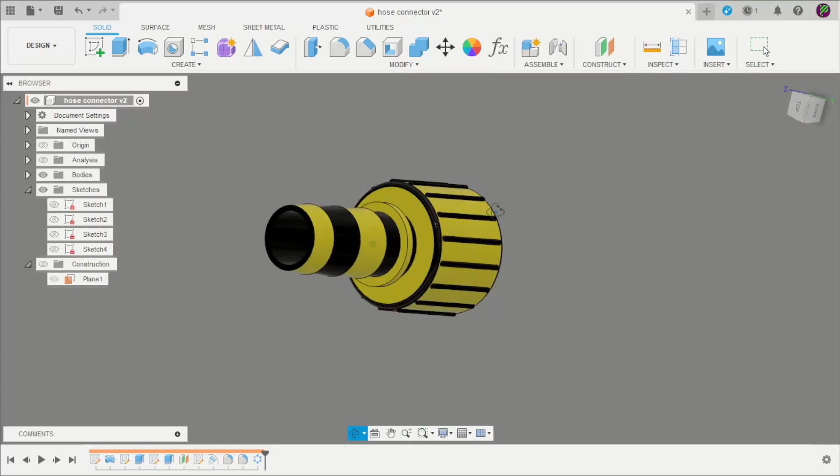For today I have this hose connector that I will create using just one profile for the revolve. I created this drawing to help you design this project. This drawing is in my ebook, which you can download on the first link of the description and follow the instructions.

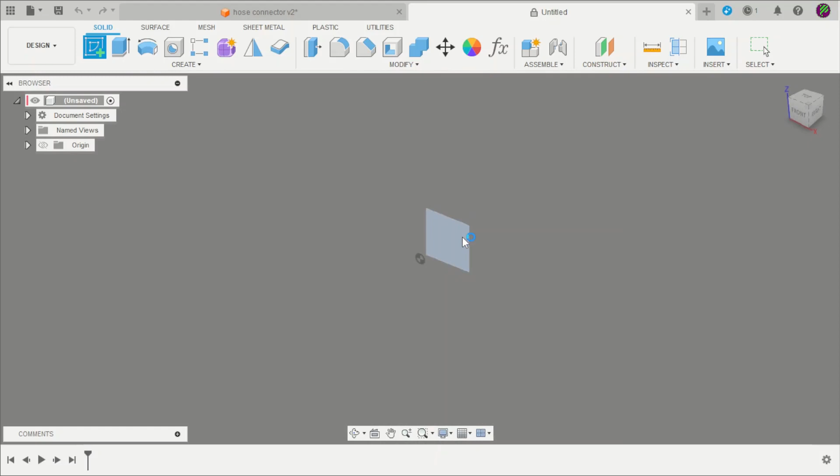Let's start. Create a sketch. Select the plane. Create a line that will be a center line. You can start by creating another line here that will be a construction line.

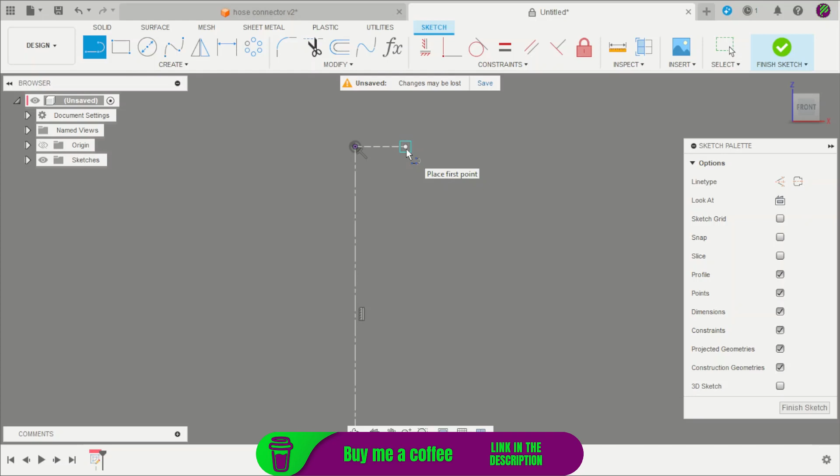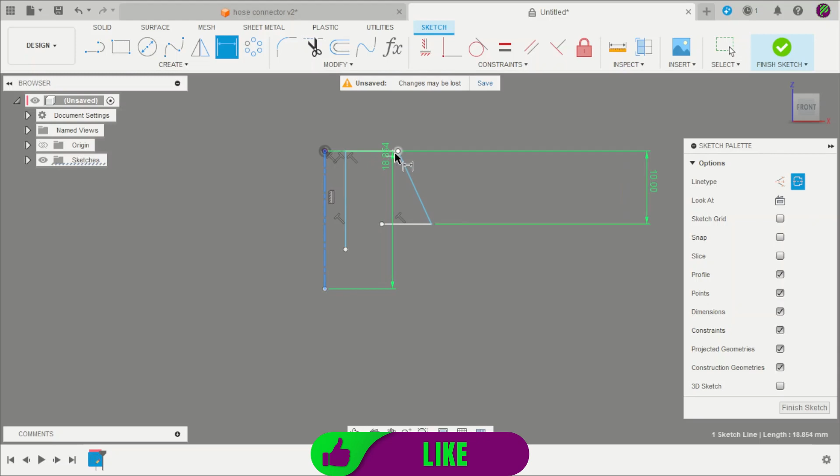Now I can start creating some lines here, here, and here. This distance needs to be 10 millimeters. This profile is 20 millimeters. This point with the center line is 24, and this point with the center line is 26 millimeters.

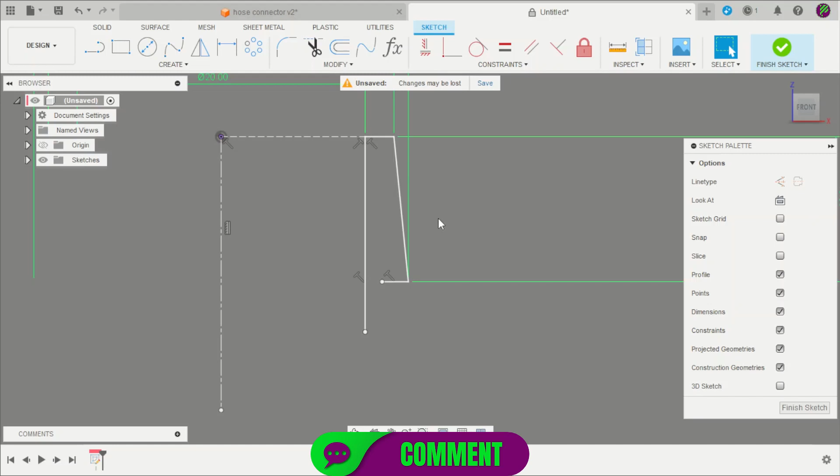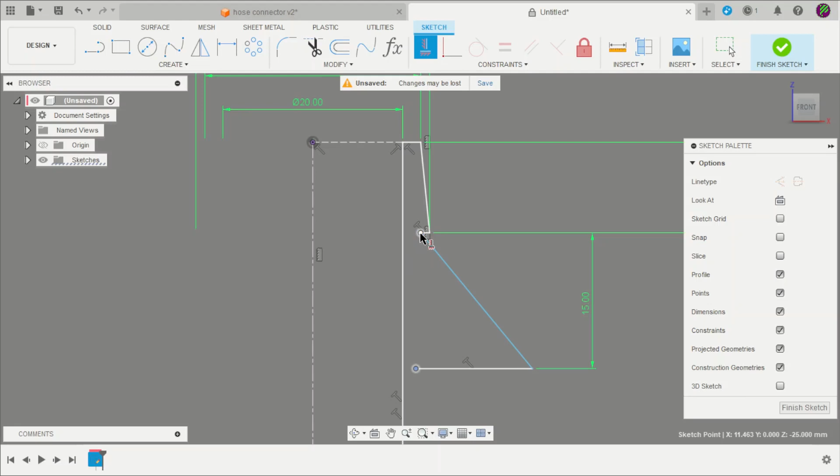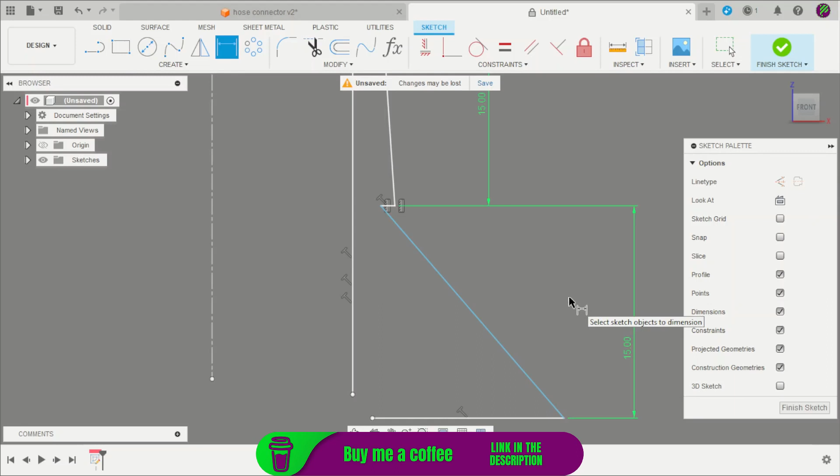That is the second profile, and repeat the process here and here. This is 15 millimeters, and constrain with the vertical 24 and 26. Now we have our profile.

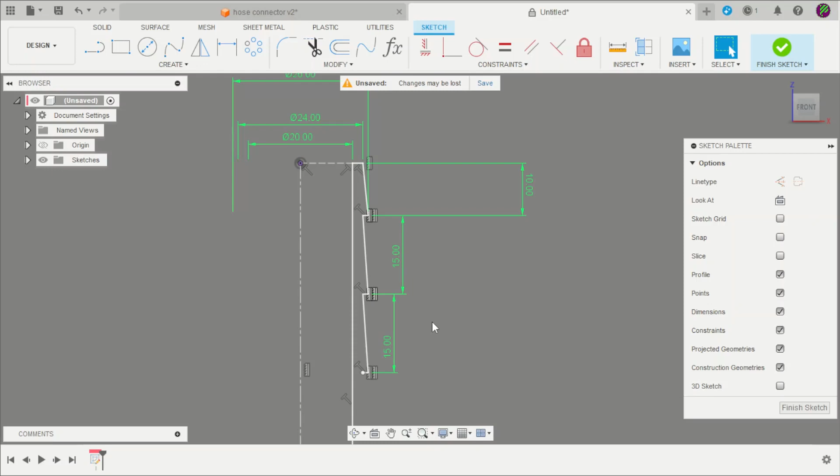Remember, just the first tooth is 10 millimeters and the next two are 15 millimeters. Now we can continue creating here. This diameter is 24. Continue creating here. Create the profile.

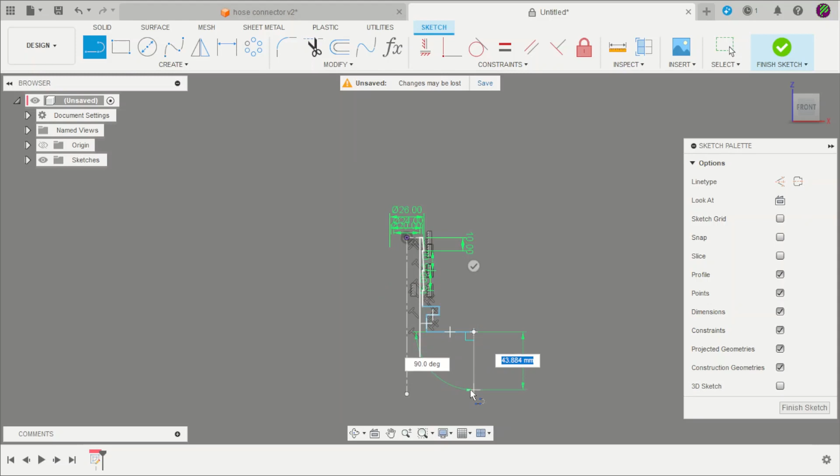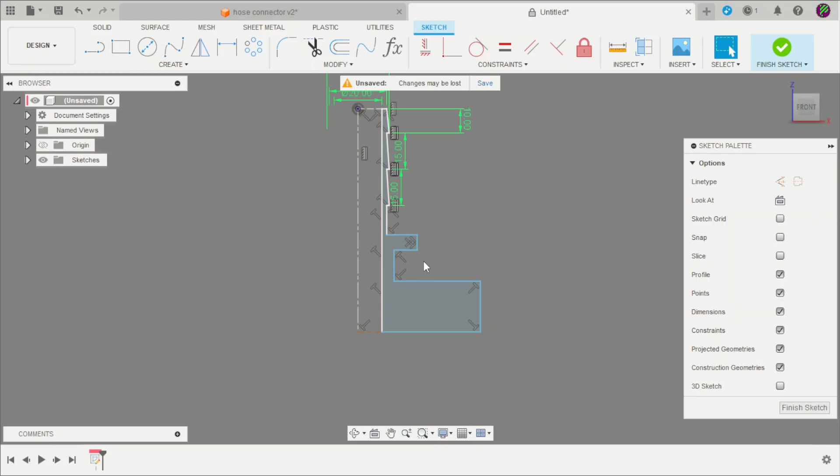Create this line and create another line. This second line is a normal. You can close this profile here and that point. 24 millimeters. This distance is 3 millimeters with 31 millimeters diameter. This is 26 millimeters diameter.

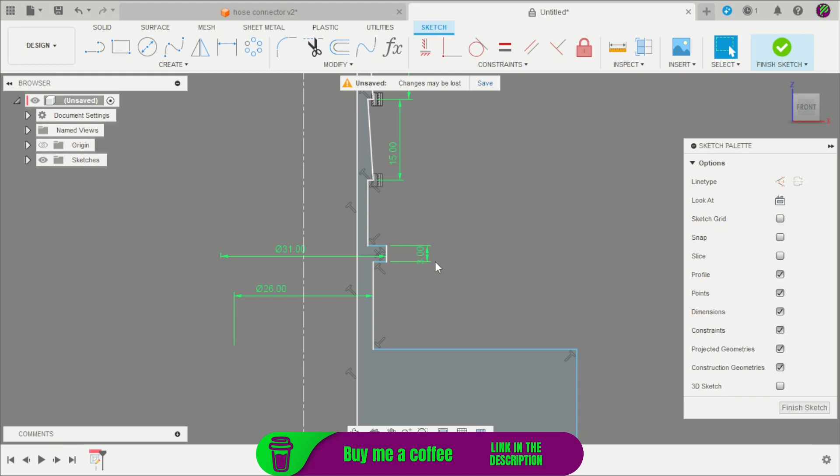Return here to the design, and the distance is 5 millimeters. This is 38 millimeters with a diameter of 47 millimeters. 47 millimeters.

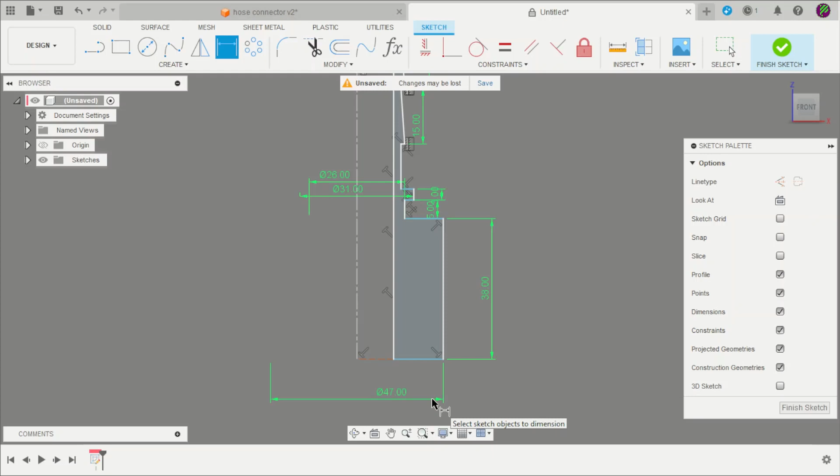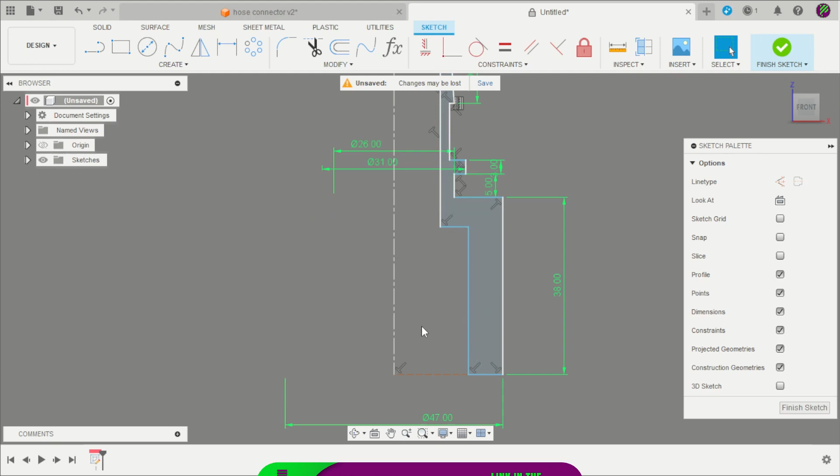And here we have to create another segment. We can cut this and connect these two profiles. Now these are 37 millimeters diameter here, and the distance to the top point to the bottom is 59.

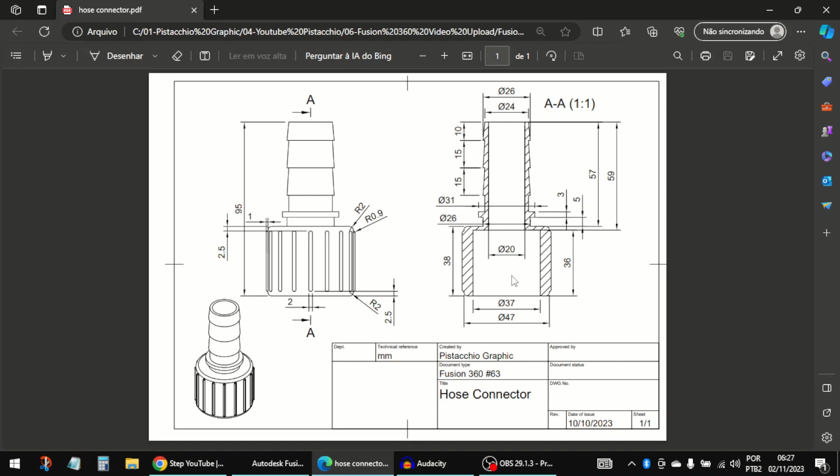This line, that line is 59 millimeters, and the distance of this line to the top line here is 57. And now we have our profile done.

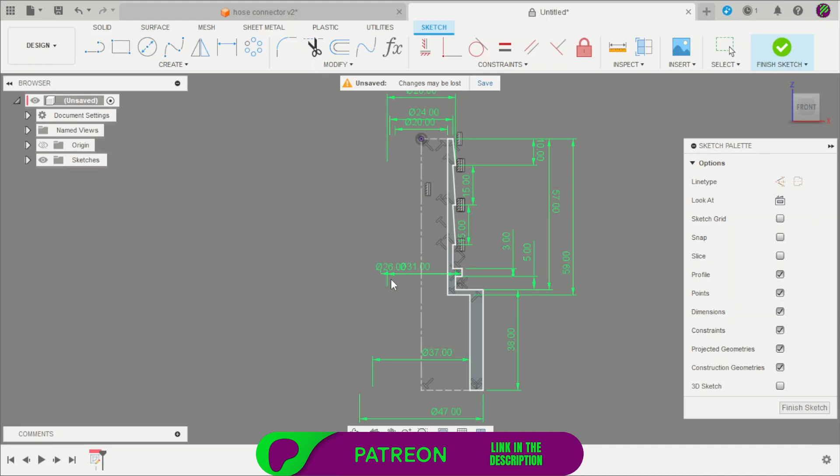We can finish the profile. Use the Revolve tool, select all, full revolve.

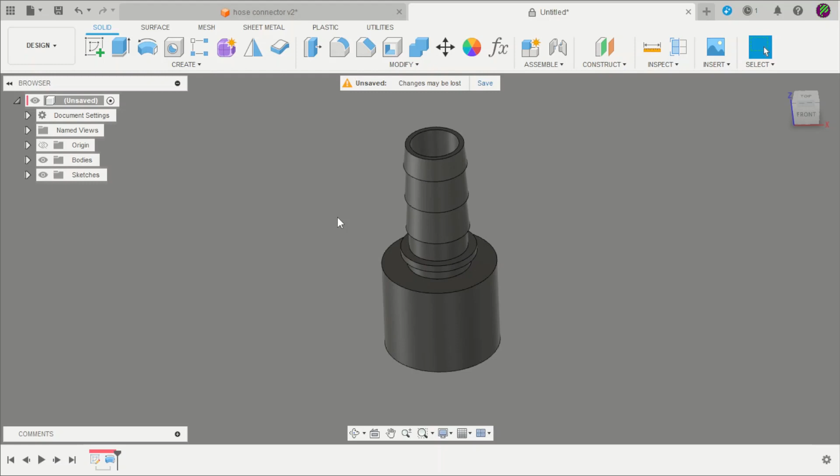And now we can apply some features for this part, that is creating a new plane that will be 24.5 millimeters distance.

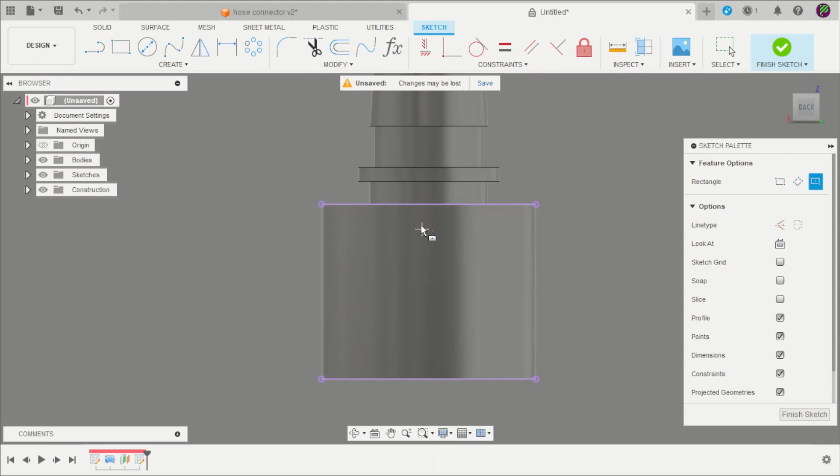Create a new sketch in that new plane. Press P for project, this line and this line. Click here. Create a rectangle by the center. Click here and here. Align that with the vertical. Apply 2 millimeters.

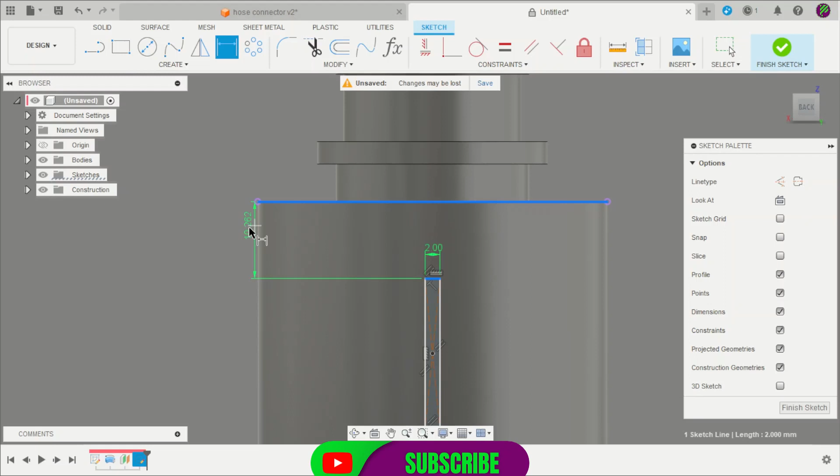Here and here, the distance of this line to that line is 2.5 millimeters. Here and here, 2.5 millimeters. Finish the sketch.

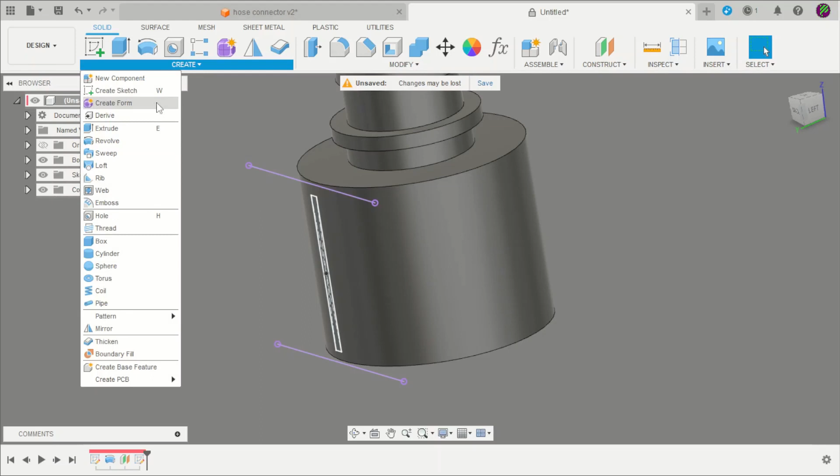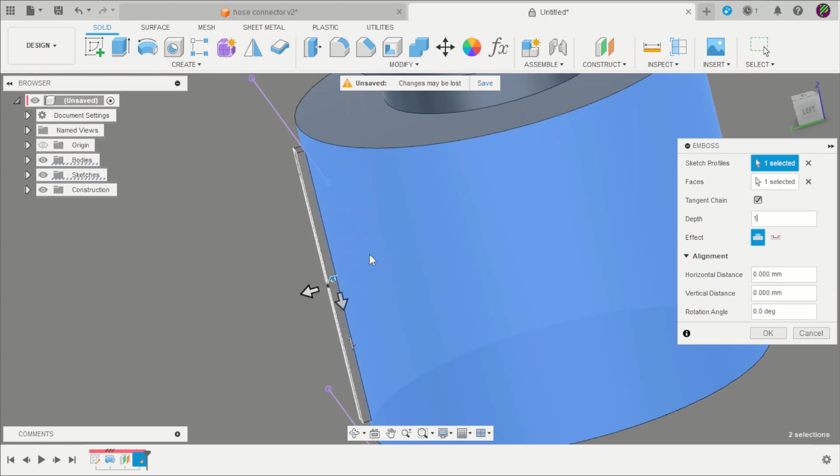Now we can use the Emboss tool on the Create tab. Select the profile. Select the face. This will be 1 millimeter. The effect is Emboss, and click OK.

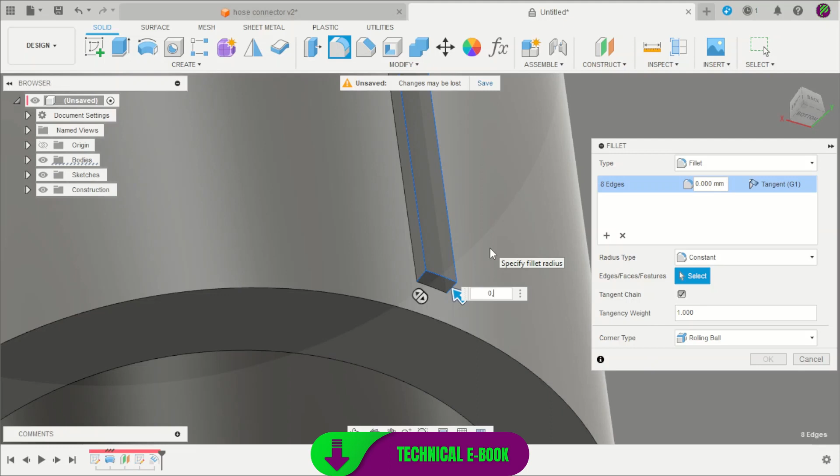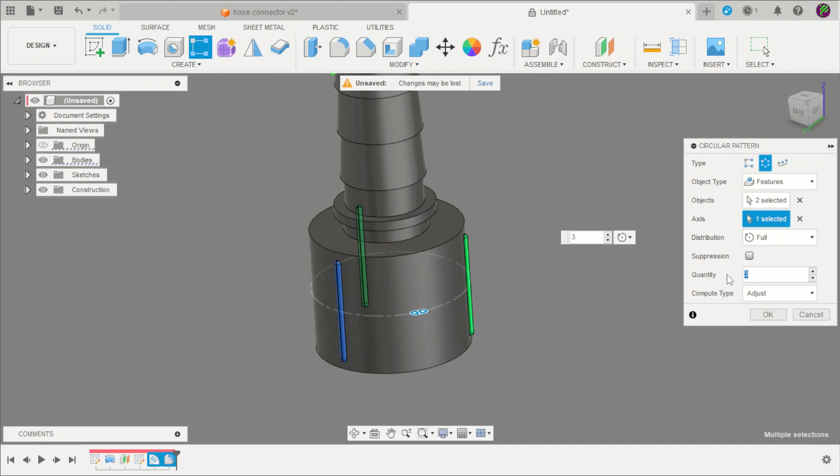Now we can apply some fillets, here on these corners, 0.9 millimeters. And repeat with the rectangular pattern. Change it to circular. Select the features, the fillet and the emboss tool. Select the axis, that is in my case the Z axis, and repeat 16, and click OK.

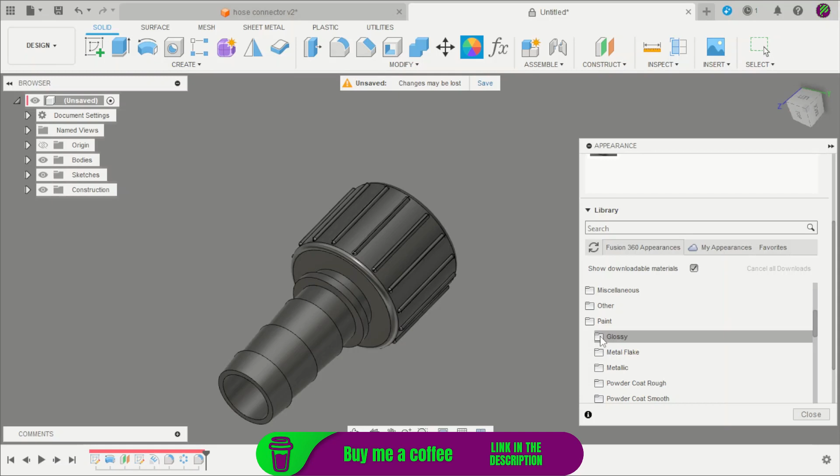Another fillet here with 2 millimeters. And to finalize the project, we can add some colors. We can change some faces to the yellow color, to make it a little bit easier to identify the project.

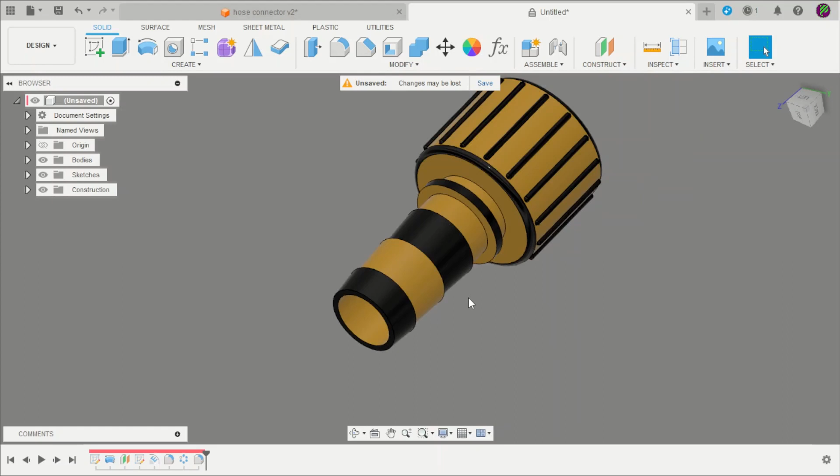And now the hose connector is done.